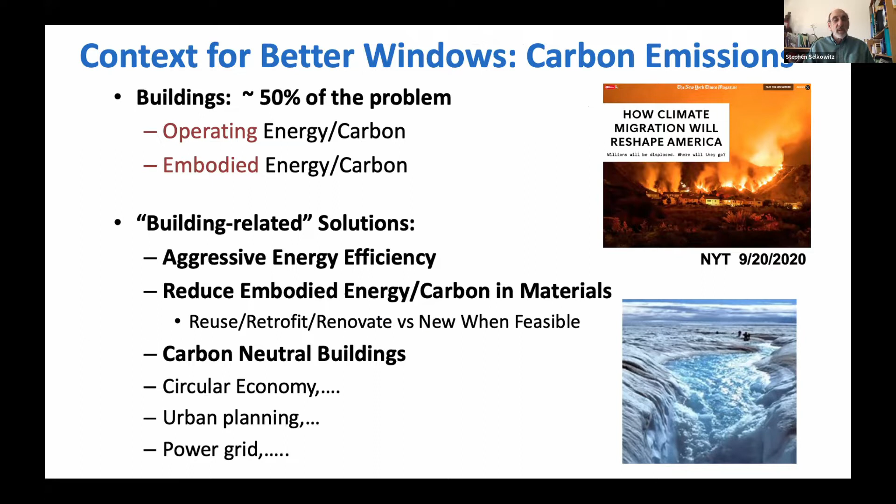There's a whole other long list of building related solutions. And I want to repeat again a theme I heard this morning, that although we're talking about windows, we're really talking about windows in the context of buildings. And it's important to understand all those kinds of relationships, a few of which I've just sort of sketched here.

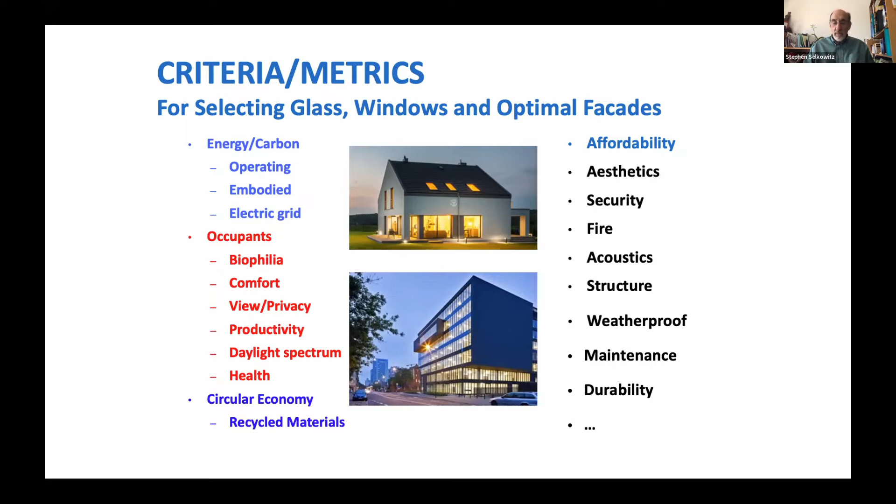But I just want to start with a reminder that this is a piece of a much bigger problem. This came up at the end of the last session as well, in terms of not losing this perspective of the forest for the trees here.

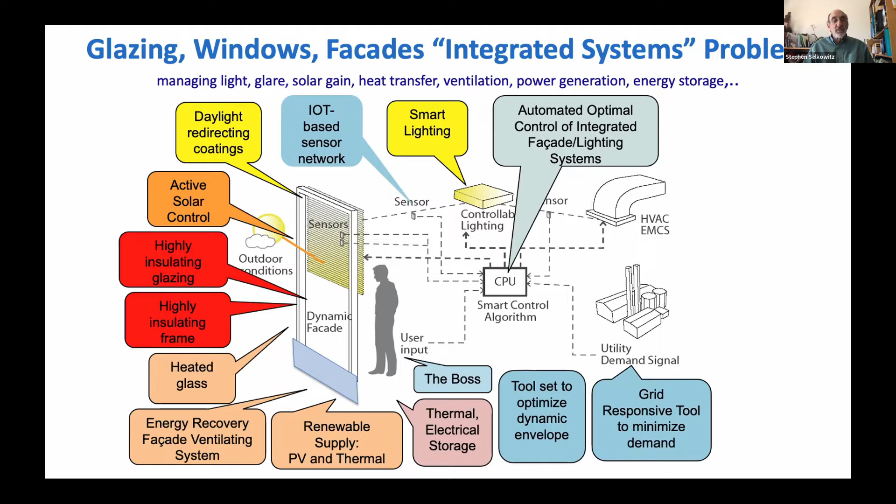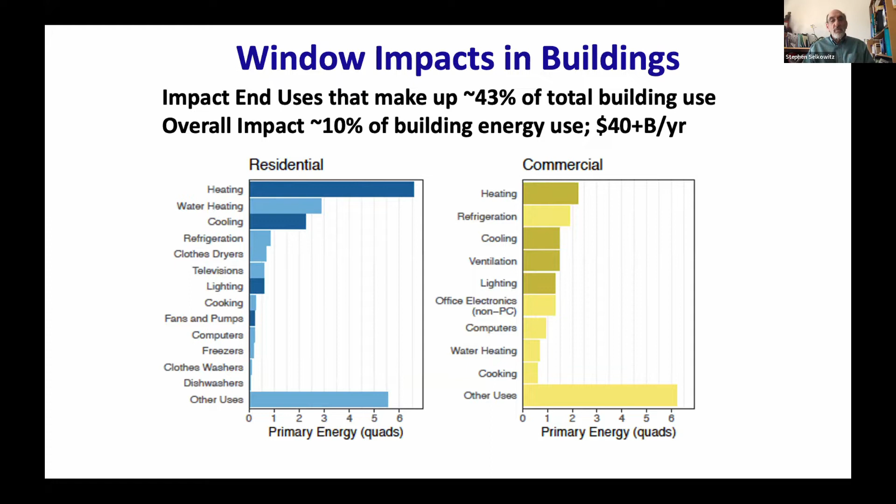So drilling down a bit into the role that windows play, if you look at the building sector in the U.S., windows impact mostly heating and cooling with some ventilation and lighting. That impacts end uses that make up about 43% of all the building use. And if you look at the pragmatic part of what they actually impact, because they don't obviously do everything, it's about 10% of all building energy use, or about $40 billion a year. So there's a target there to be saved.

If we drill down a bit more and look at a few separate issues here, one of the points I want to highlight, I'll come back to later, is that this is not just a new building issue, this is an existing building issue as well. So we have 48 million homes in the US, about 41% of all the houses out there, that are still single glazed. And there's this market out there of 1.4 billion windows.

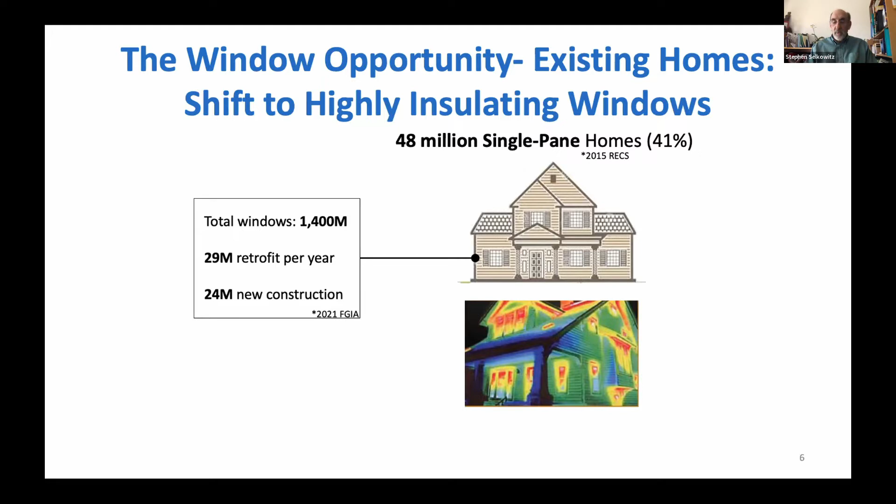We're replacing them at the rate here of, well, the 29 million retrofit a year. Some of that is replacement, some of that is adding a room to a house. But we're replacing at a pretty slow rate. We aren't going to make a lot of progress in taking care of all those single pane windows unless we do something special about it. But the problem isn't just older buildings. The problem is new buildings as well.

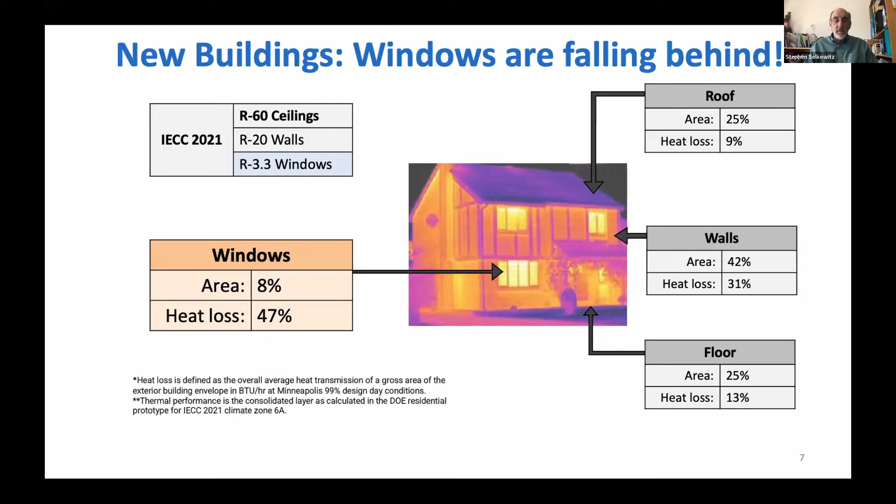Now, my perspective on this and the work I've been doing for 40 years has been that we can do much better. And in fact, I go out to the extreme and say that we're smart enough to design window and facade systems that will do better than an insulated opaque wall. And not only that, but we can do it in almost any climate and pretty much almost any glass area.

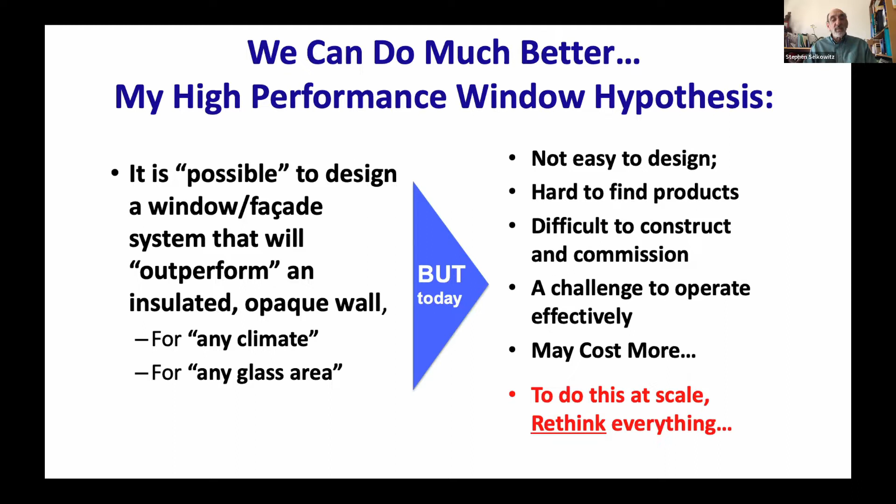Now, that's the theoretical limit, but the caution's on the right. It's not going to be easy to do. The products may or may not be out there at the moment. You still have to build it and operate it effectively, and it's probably going to cost more. But at least we think it's technically possible to do that. And at least in terms of trying to frame the discussion, it starts to give you some sense about what the possibilities might be.

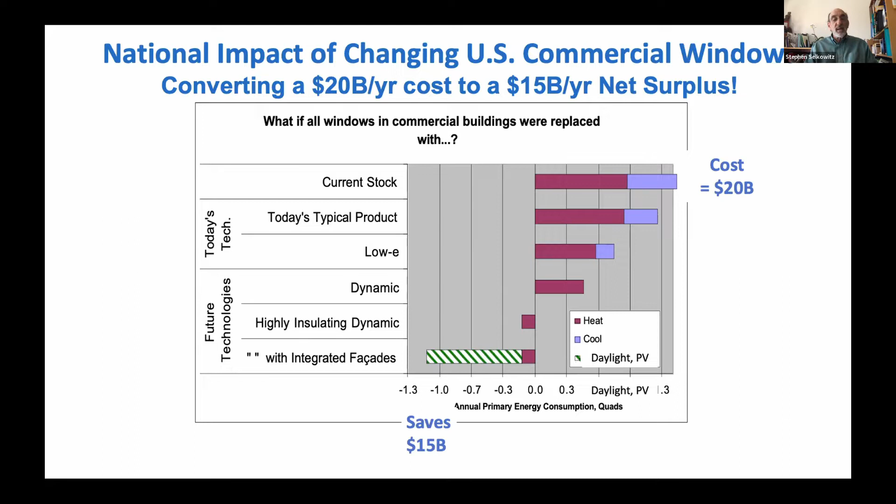But the key issues in the middle here are basically reducing the heat loss, the highly insulating windows, and because of the role of cooling in these buildings, you also want to control the cooling load. So you can get from this 20 billion cost to a $15 billion savings if we do all the right things. Now, this is going to be obviously sensitive to building type, to building size, to climate.

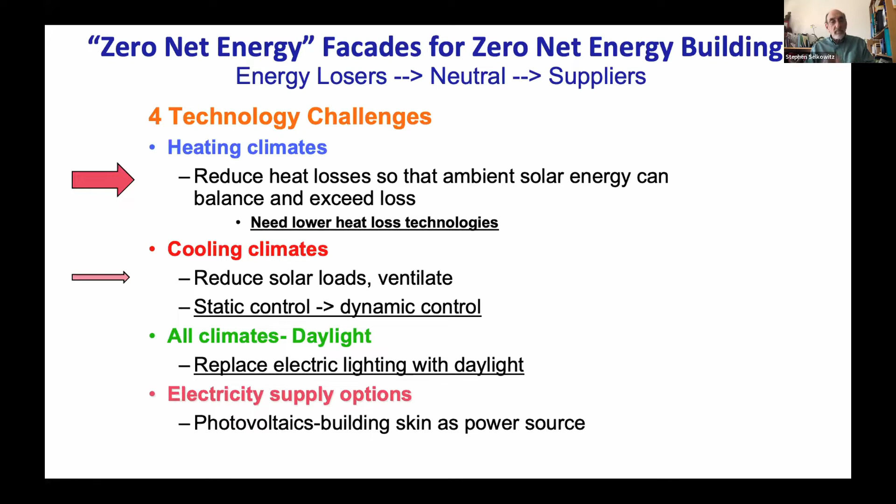And just in terms of thinking about climate here, this zero energy facade or zero net energy approach obviously is going to be different in a heating climate or a cooling climate. And for purposes of the talk now, I'm going to focus more on the heating side, but I don't want to lose track of the cooling side. These are increasingly important also because a lot of the construction in the US is in southern climates where cooling is more important. So let's take a look at the window market in more detail. Good news, bad news curve here. This is a plot of the sales of US windows.

This is residential windows from the 70s, early 70s to about now. So you see the gray curve there, single glazing. After the advent of that first energy crisis in the 70s, single glazing dropped, double glazing went up. That was sort of good news at the time, but we can do much better than an R2 double glazing. And the orange curve there are low-E double.

And this, in fact, I started at the lab in the mid 70s, and the first project we worked on was to try to get low-E out of the laboratory into the marketplace. And I think the track record here looks pretty good. We've gone from 0 to about 90% of the market. But these windows are still only about in the range of R3.

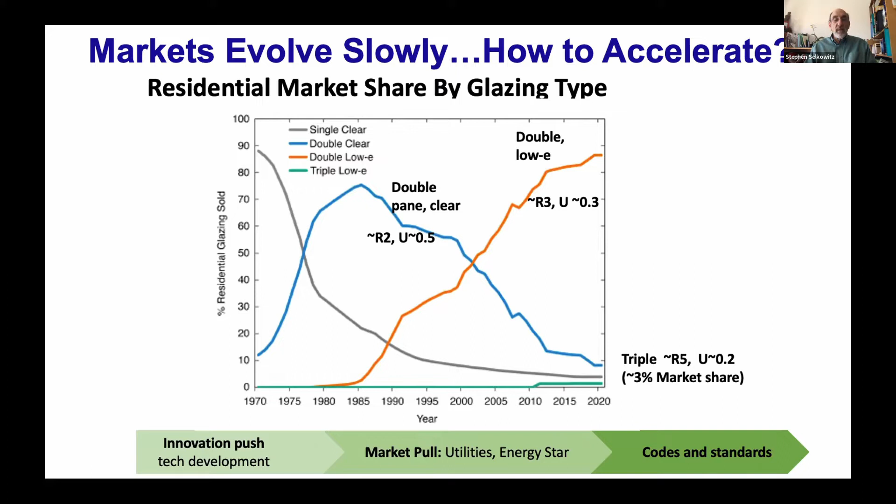If you look at the bottom on the right there, the green line is triples. It's a couple % of market share, and it hasn't changed a lot in a long time. So we have a real challenge here. The other thing on the good news, bad news part is the fact that we're up to 90% on double low-E is good. The fact that it took 30 to 40 years, if we have that kind of track record going to triple, we're going to be in trouble because we can't wait.

So what do we know about triple glazed windows in homes today? Most passive buildings, passive houses, I think probably have them. There's a collection of what we'll call zero energy or zero energy ready homes in the US. There was a survey done recently of a bunch of those builders. They found about 2/3 of those builders were using triple glazing. So passive house uses triple, some of the zero energy homes use triple, that's great.

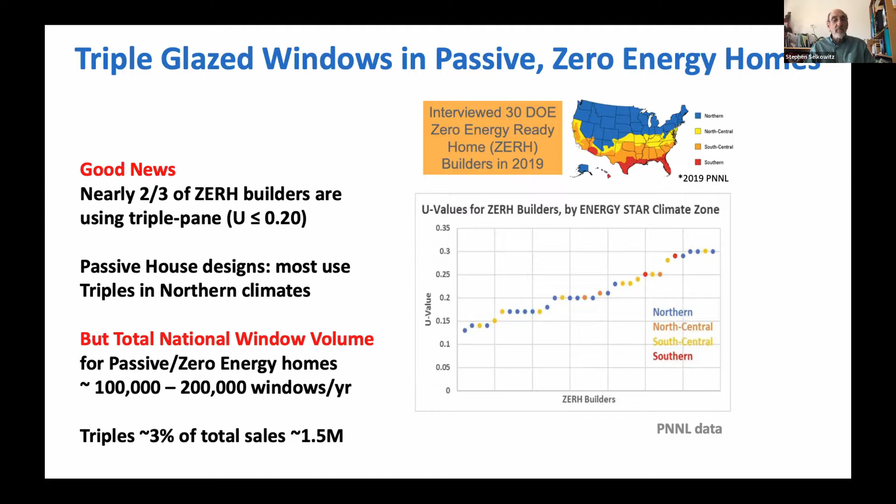If you add them up, and I've tried to guesstimate some of these numbers, I think if you look at all the buildings that fall in those two categories, you end up with a couple 100,000 windows per year in a national market of 50 million. So if you're a company making windows and you say, I want to make windows for the market, this isn't yet at the point where it's going to attract a lot of your attention. That chicken and egg is partly why we see such a small number of triples in the market today.

Now, take a slightly closer look at where windows are sold. These are the Energy Star criteria for climates, which map other code requirements also. You see that most of the windows are in the north and north central. Notice that the retrofit market is bigger, which makes some sense. These are probably older cities with older homes than, for example, in the south. And I'm starting to flag Energy Star here because my theme is going to be that Energy Star has some traction in the marketplace, and we want to try and build on that traction.

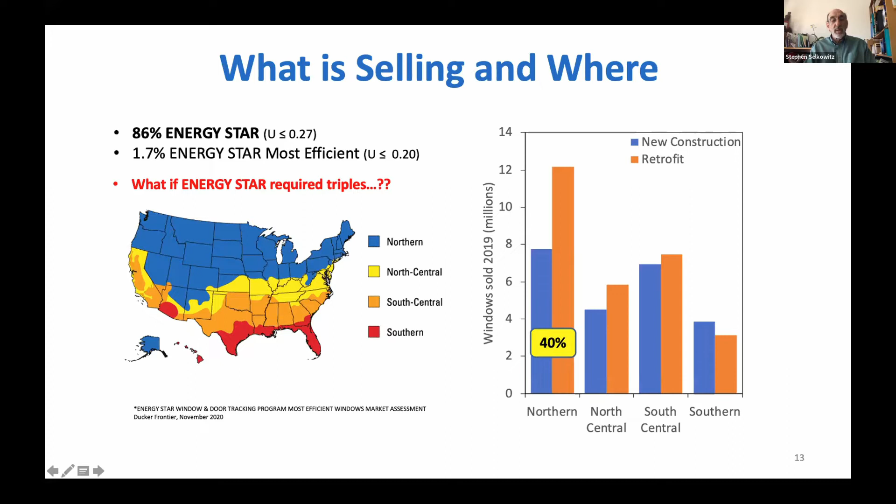The current Energy Star in the northern part of the US is a 0.27 window, which is easily obtained by double. That's partly why you see the dominance of those double low-E. But this question I ask here, what if Energy Star required triple? What kind of a difference might that make? So this is the sort of theme for the major middle part of the talk here, is that Energy Star has a lot of traction in the US. It's a voluntary program, but it captures 80 to 90% of all sales.

And if we could move that program to require basically triples, at least in the northern half of the country, we would reframe the way that window companies look at the market and perhaps get them to spend a lot more time and energy offering the products that in principle we know they can make now, but they don't make in volume. There's some organizations such as Partnership for Advanced Windows and the utility incentive programs that I'll come back to later that are trying to leverage this as well. And I'm going to come back with a little more detail on Energy Star in a minute as well.

Before I get into that, though, I also want to repeat comments that were made earlier today that although I'm going to drill down mostly in the glazing portion of this, the glazing is only a piece of the overall window curtain wall framing, and those in turn are only pieces of the bigger wall integration, thermal bridging. You've heard a lot about that this morning, so I'm going to focus on a piece of the problem, not the entire problem.

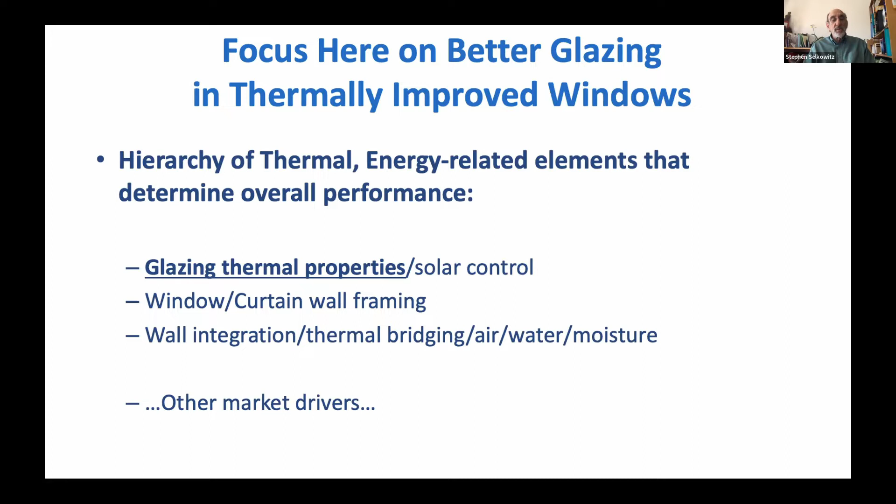If we go back to the manufacturer side, though, although in principle it's straightforward to make a highly insulating triple glazed window, if you look at it from the manufacturer's point of view, there's a lot of moving parts here. There's a lot of pieces and parts that you have to decide on. Helen went through a lot of the detail just on some of the spacers and the sealants. And there are those kinds of issues that exist across the entire portfolio of elements of the window here.

In the upper portion are glass and coatings, on the left are spacers and sealants, and the right are sash and frame. So you get all of this stuff on the top part that goes into the IGU, and that goes into the sash and frame, and you get your window. But there's an awful lot of work that goes on behind the window in terms of all of the details. And as you heard this morning, those details really do matter.

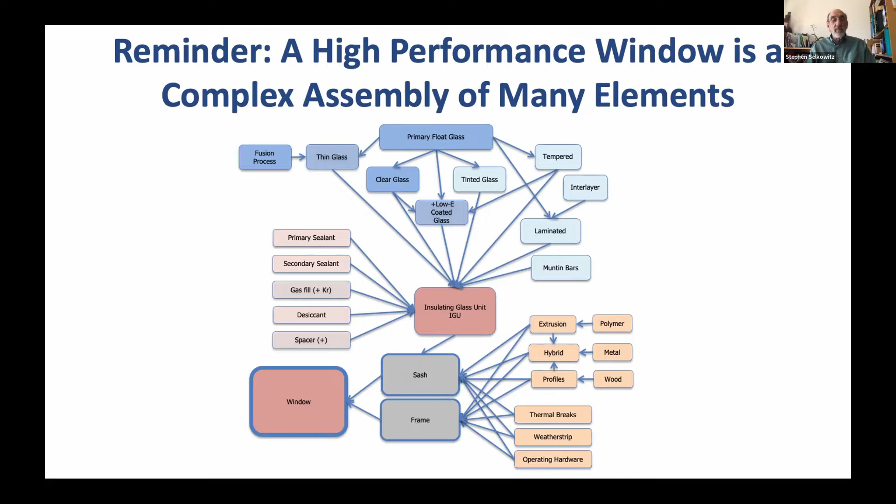Now, the other side of the coin is you have to be able to make this and make it cost effectively and at scale. The good news here, at least on the IGU side as well as the window side, is there's a lot of automation going on now in the marketplace. These are lines that are like 100 feet long that take raw glass or coated glass in the front end and end up with a fully fabricated IGU of any size and shape with gas filling and all that. These are on the market now from a lot of different companies. They make on the order of 1,000 units a day.

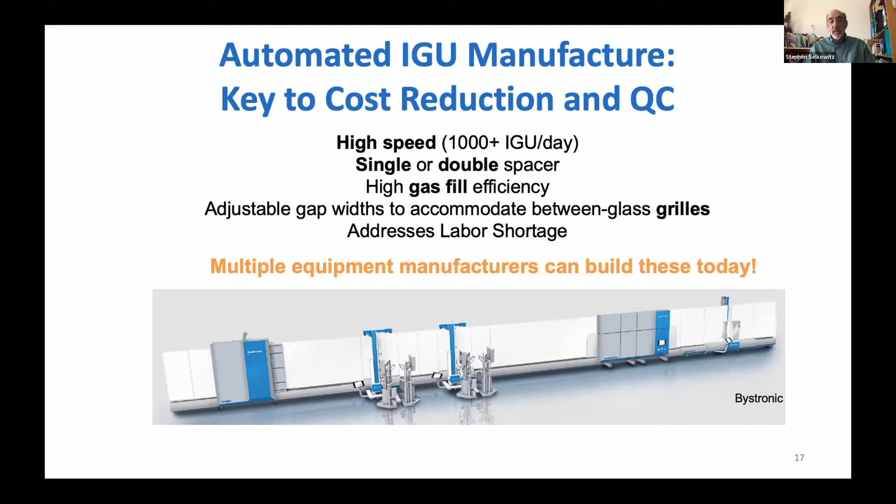So if you think about the capacity and the market needs, if you have a tiny market, if you're only making 30 or 40 windows a day in a specialty market, you aren't going to invest in a machine like this. So getting volume up, getting the market to see that volume and understand it and build for it is critically important. Now, we want to try to get a sense of what doubles and triples can do in the market. I want to talk about this transition from double to triple.

The NFRC product database is a good resource. This has been mentioned earlier today a couple times. This lists all the products that are NFRC certified. I'm going to talk now about this new Energy Star. Energy Star version 7 was proposed, and there's a new draft out. Assuming the draft goes through as planned, it might be effective middle of next year, middle of 2023. But you need time to plan for this anyway.

The numbers you see on the right there, in the northern zone, it would require a U value of about 0.22. There are some trade-offs here. You can do a solar heat gain trade-off, as they've done in the past, that brings it up to 0.25 or 0.26. But the primary target here is going to be this 0.22.

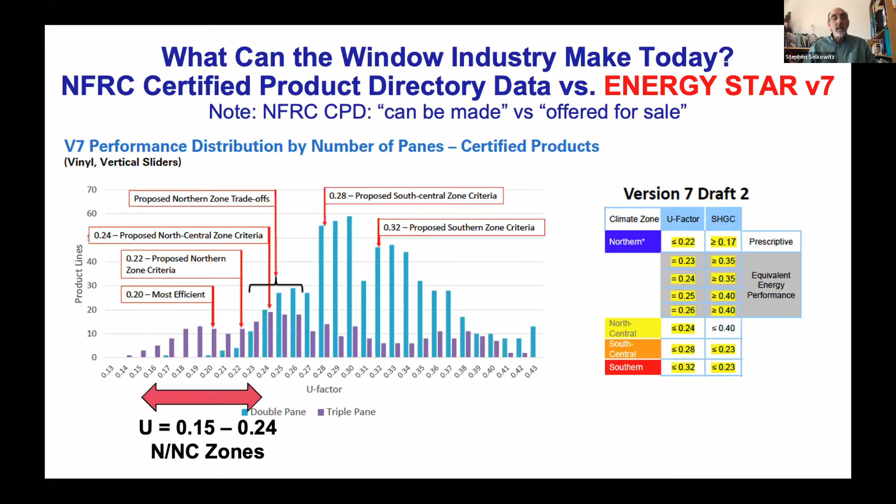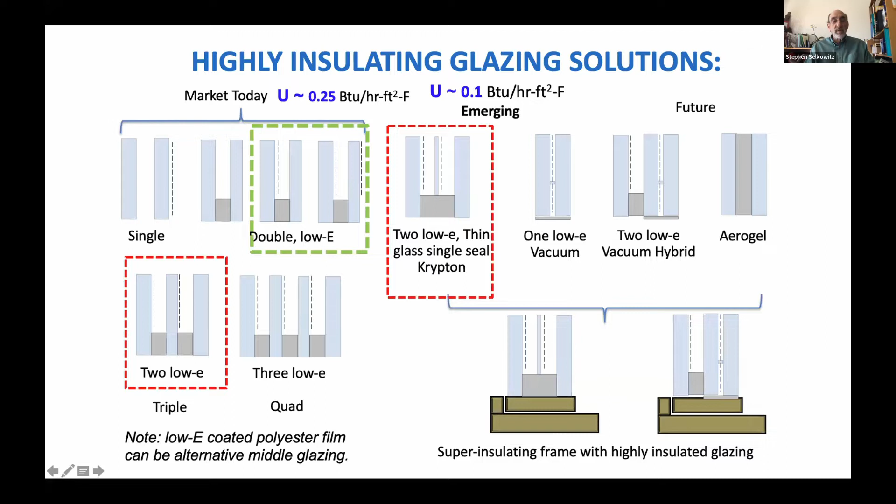I'm going to come back to that in a minute, because that's a strategy or an approach that we think might make some sense for companies who currently make doubles, don't want to retool sash and frames to fit triples, but want to be able to meet those 0.2 U value requirements. And in the lower right here, I'm reminding you that the sash and frame make a difference, even though I'm focusing here on the glazing.

And again, this issue came up extensively this morning, the NFRC standard size versus the way the Passive House deals with all of this. Just as a reminder, if you have a fixed window with the NFRC standard size, 70% is roughly center of glass, and the other is edge of glass and frame. If you have an operable window, it's even less. So I'm going to talk now in a few slides about glass properties and window properties, and making the distinction here, because the glass properties can be easily brought down to the numbers of 0.2 or below, but the sash and frame need to follow through as well.

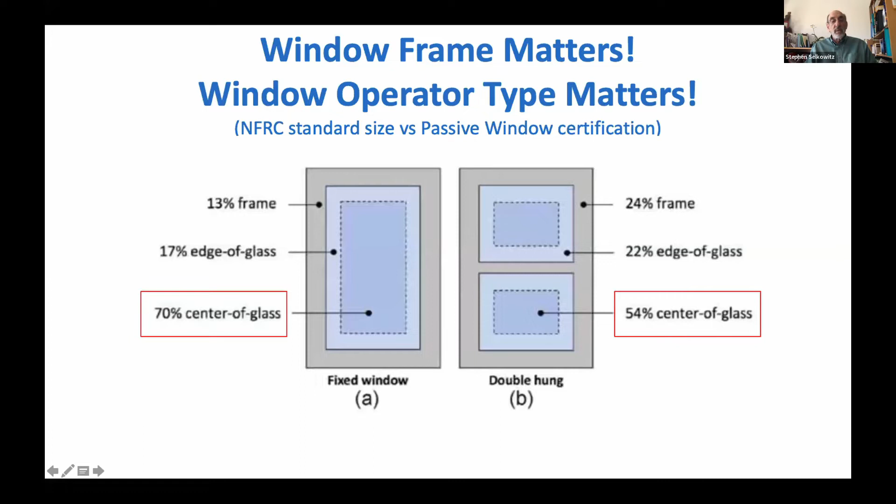So now I'm going to show you 2 slides that are a bit complicated, but I'm going to get into this issue of the width of the IGU. One with a 3/4 inch IGU and the other with a 1 1/4 inch IGU. Something like 70% of all the windows sold in the US now have a 3/4 inch IGU. That's not surprising, because that's where the optimum is for double glazing in terms of the air fill or argon fill. This came up this morning in terms of the differences between US and Europe in terms of temperatures. I'm not going to go back and rehash that. But in the US, a 1/2 inch gap is optimal for argon or air. That's why you have a lot of these 3/4 inch IGUs.

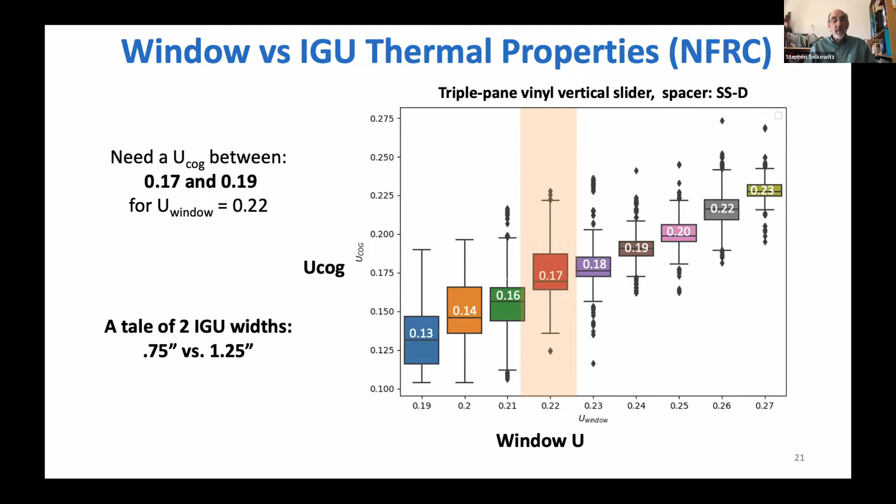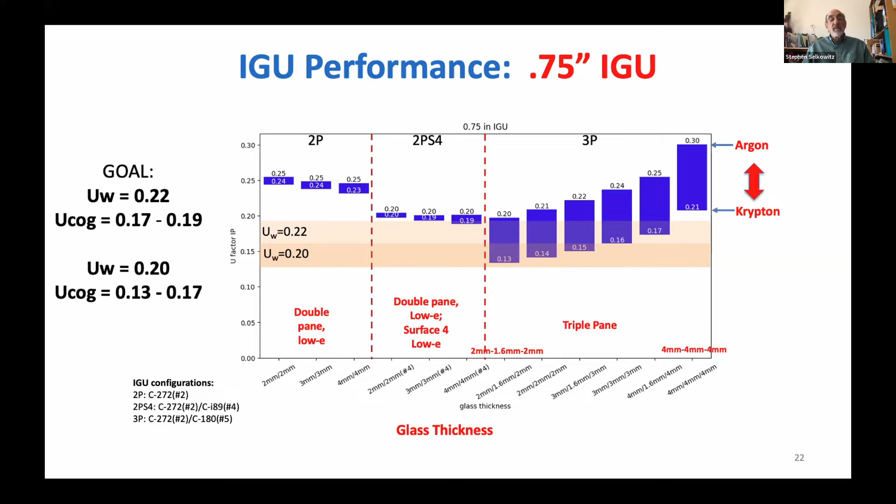So the reason I spent a few minutes on all this is that if you're making windows now, and you make a window with a 3/4 inch IGU, you have some tough choices to make about how you would get to 0.22 in terms of the options I showed you before. If you're making a window that has a wider gap now, the sash and frame already accommodate a 1 1/4 inch IGU, you have lots of options and it's much easier.

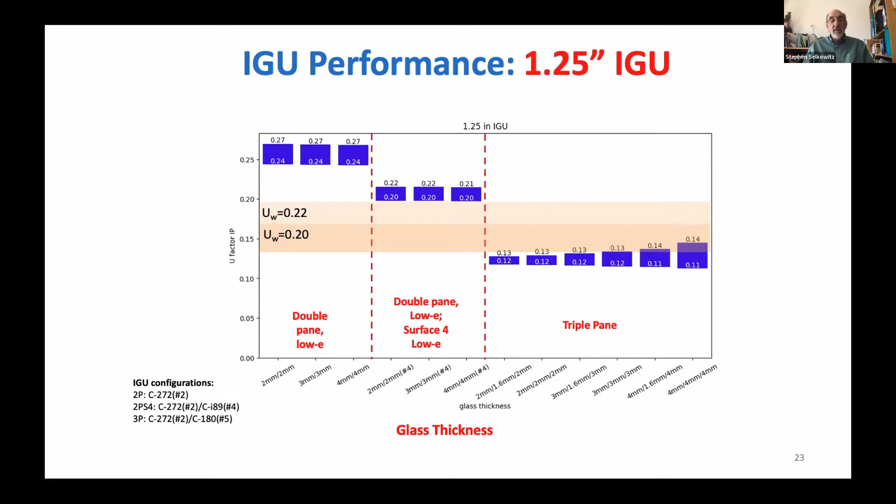So the one thing that we worked on to try to help those folks that are making the 3/4 inch IGU is to be able to achieve the 0.22 value, the 0.2 value, without changing sash and frame. In the long run, you say, well, they should change sash and frame because the world evolves, and maybe they will. In the short term, though, if you make windows and you have to think about investments, you'd perhaps like other options.

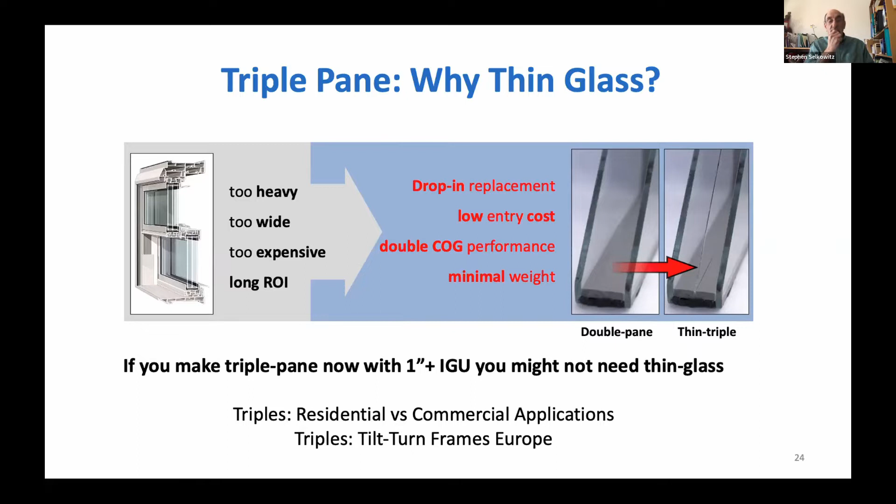So the concept here is to drop a piece of very thin glass into the center of a double glazed IGU, this 3/4 inch IGU. Add either argon or krypton, depending on what you're trying to achieve, and look at what kind of values you get. If we look at this in more detail, this is what we're doing.

But the other thing you could do, especially with this thin piece of glass, is just essentially hold it in the center of a single spacer, keep it from bouncing around, but not sealing it. That pressure equalizes the 2 gas spaces. It means you only have 2 seals. It means you only have 2 possibilities for leakage. It seemed like an intriguing way to go.

I'll throw out one other little factoid here. There's about as much thin glass that goes into American homes each year in the form of televisions as window area that goes into homes. We buy about 40 million televisions each year, which go into your homes. There's about 50 million windows that go into homes. So 50 million windows go into houses, 40 million TVs go into houses.

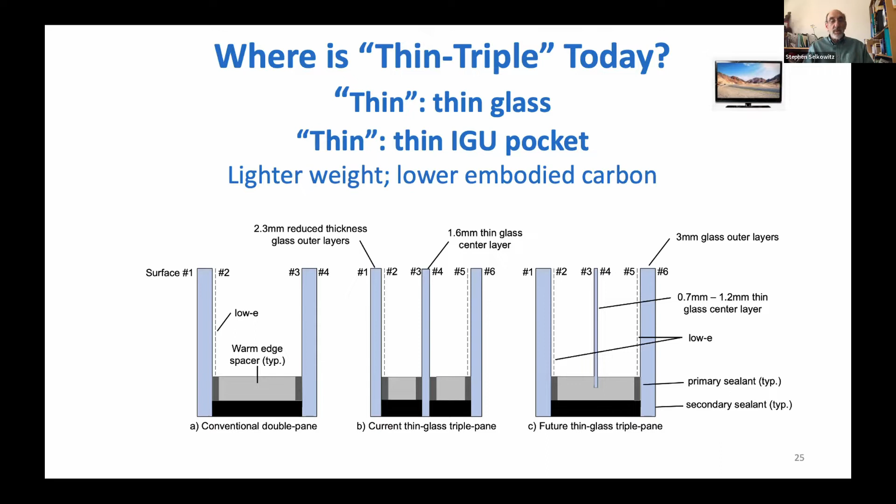And these days, the TV is rapidly assuming the size of a typical window. Typical window is maybe 12 to 15 square feet. Typical TV is 7 to 8 square feet. So there's actually a lot of industrial experience with thin glass, just not in the window industry. Now, a few folks have.

Steve, yeah, just a quick, maybe 1 minute more to close up. Okay, that's going to be tough, but I'll shoot through them quickly.

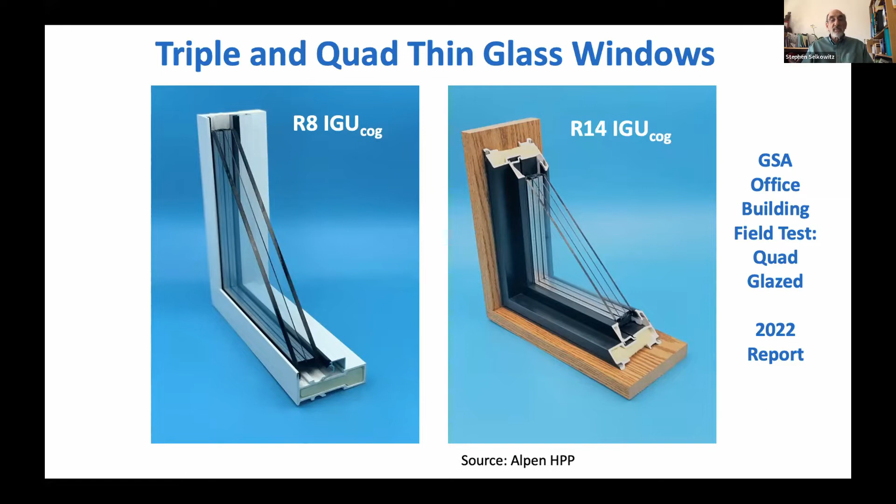Okay, so there are some products on the market now that use thin glass. Notice if you go to a quad, that's an R14 center glass. So actually, the closing slides, and so that was my end on the glazing.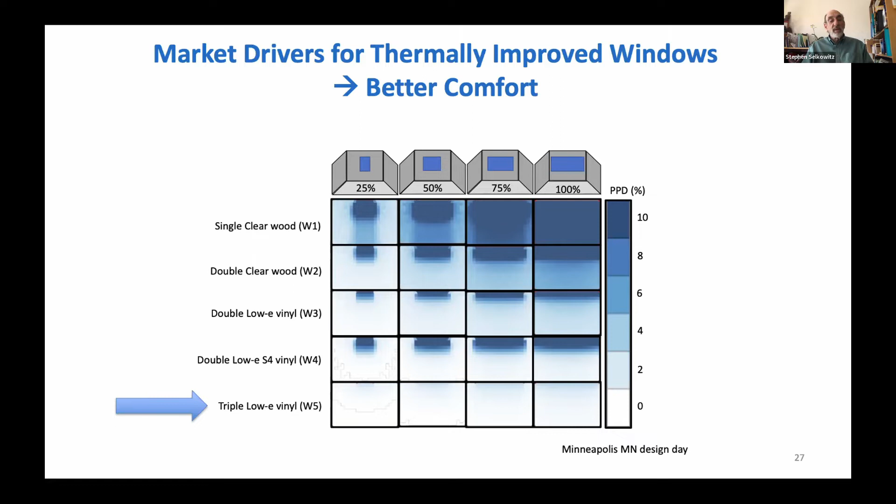I just wanted to throw in a few more pitches for why we want better windows and why the industry should shift. And I'll try to do this in not much more than a minute. So comfort, this has been mentioned before. Triple glazing gives you ideal comfort in any glass area here from 25 to 100%. Notice if you go to double or double low-E, portions of the room are going to be uncomfortable.

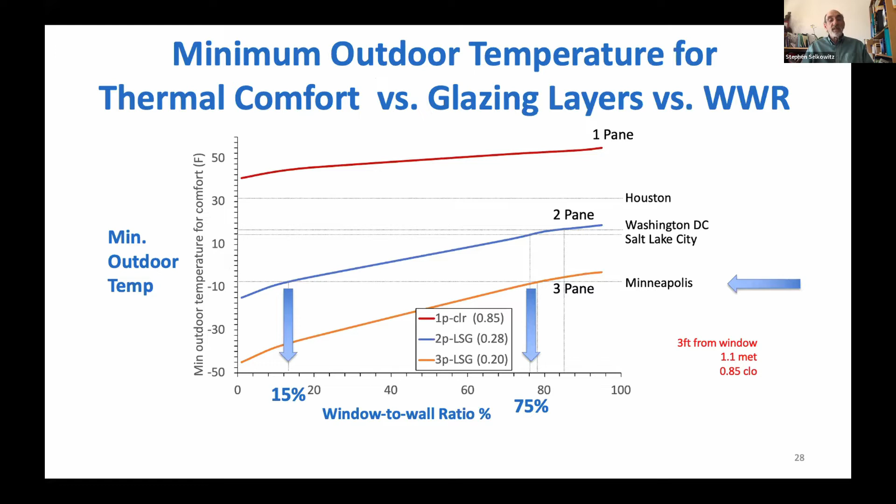This is a different way of looking at it. A version of this was shown this morning. If you're in Minnesota and you want to be comfortable as a function of glass area, if you are using triple, you can have glazing up to 75%. If you're using double, it's 15%. So there's a clear advantage there.

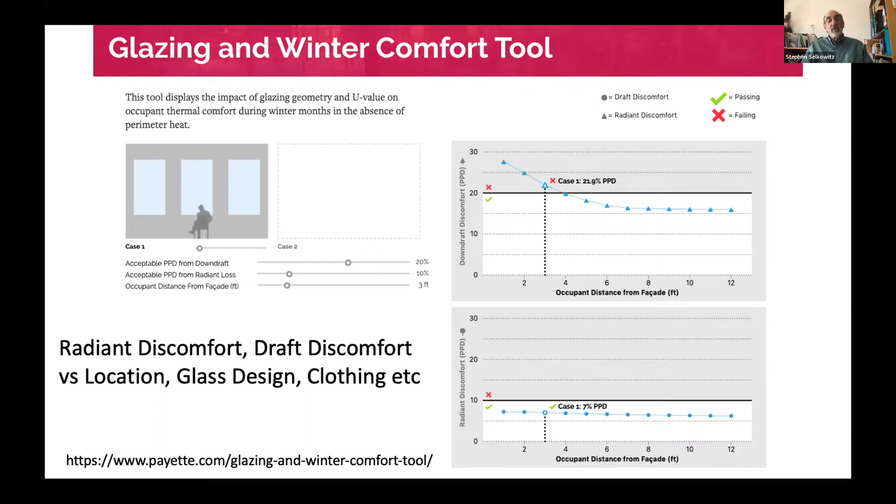If you want to dig into this in more detail, there's a nice calculator online, courtesy of Payette. This deals with radiant discomfort from the surface of the glass and draft discomfort from cold air falling off the glass.

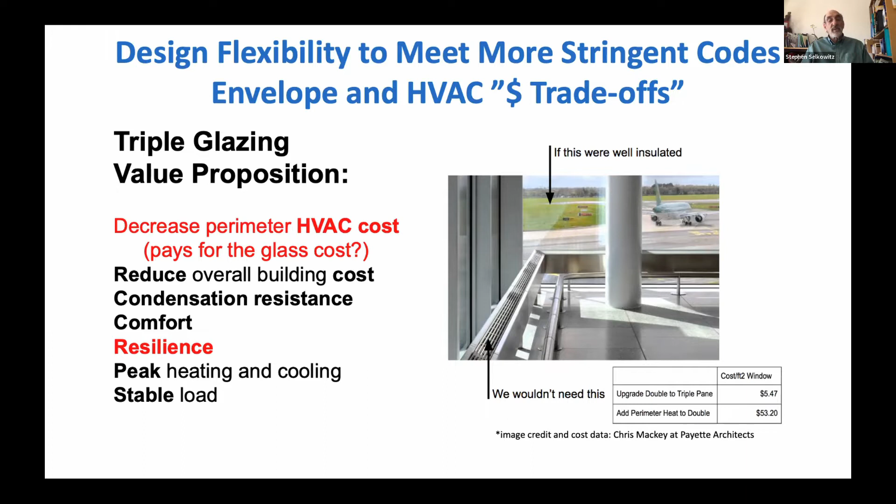The other related piece here, which gets into cost, is if you're building, in a lot of cases, you'll see all glass facades with these heaters at the base of the glass. This isn't so much to heat the space, it's to keep people comfortable near that cold glass area. If you go to triple, in most cases, you aren't going to need that. And the cost of going to triple in general should be less than the cost of putting in those radiant heating systems. The problem is you have to have confidence in this on the part of the engineer that that will really work.

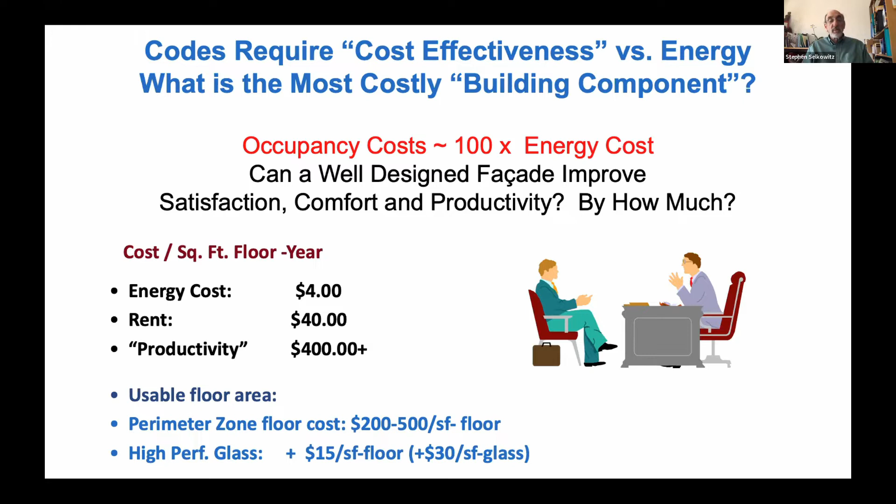And if we talk about cost, aside from all the energy savings, the biggest cost by far in a building are people costs. And I think you've all heard versions of this, that the cost of occupancy in a building, at least a commercial building, is on the order of 100 times the cost of energy. There are some other interesting issues to explore in terms of the cost of floor area. Floor area today in an office building could be $200 to $500 a square foot. You often give it up by moving the desks away from the window in order to preserve comfort. You don't need to do that with the right solar control and the right insulating control.

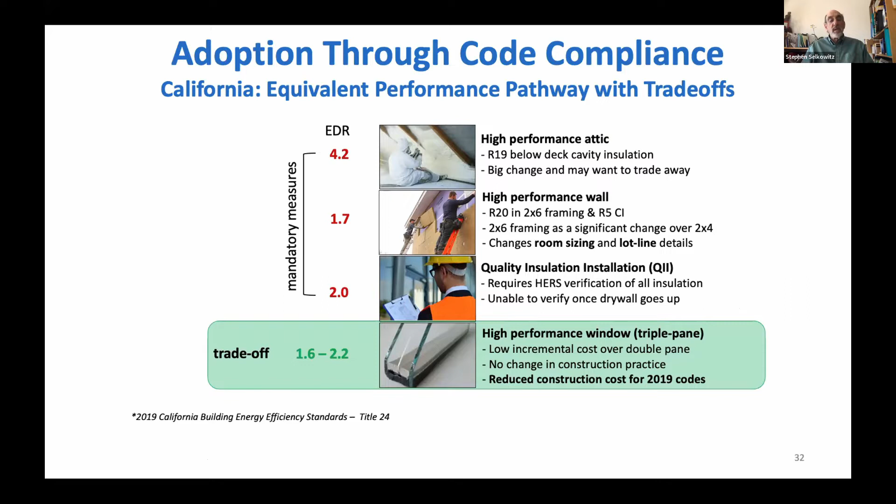One other example, modern new codes, California's new code, they require new high performance walls, but they don't require anything more in the way of windows. But you can do trade-offs. And if you're a builder and you don't want to transition from 2x4 to 2x6 framing or exterior insulation, you can use triples instead. So we've seen a niche market here, possibly for better windows in California.

So I want to close by talking about some groups that are pushing or working hard on this. I mentioned PAWS before, Partnership for Advanced Window Solutions. This is a group that's trying to change the marketplace. It's not a technical group per se, but it's going to leverage and lean on organizations that are doing that. And I'll also throw in here for good luck that, I don't know if all of you know, 2022 is the International Year of Glass, and their trademark is Glass Can Save the World. So I think we want to pile on and help explain how they can do that.

One of the things PAWS will do is work with utilities to get incentives for better windows. So in the first year that you get new products in the market, they're typically more expensive. If we can help offset some of those costs, that's an option to do.

And then finally, the last comment is that we have a lot of interest in the US in decarbonizing the grid, changing out all that gas heating to electric heat pumps. It's crazy to do that in all those single glazed and double glazed homes. We could save billions in both the heat pumps' cost themselves, as well as the electric infrastructure that will have to back them up, if we first did something about the envelope.

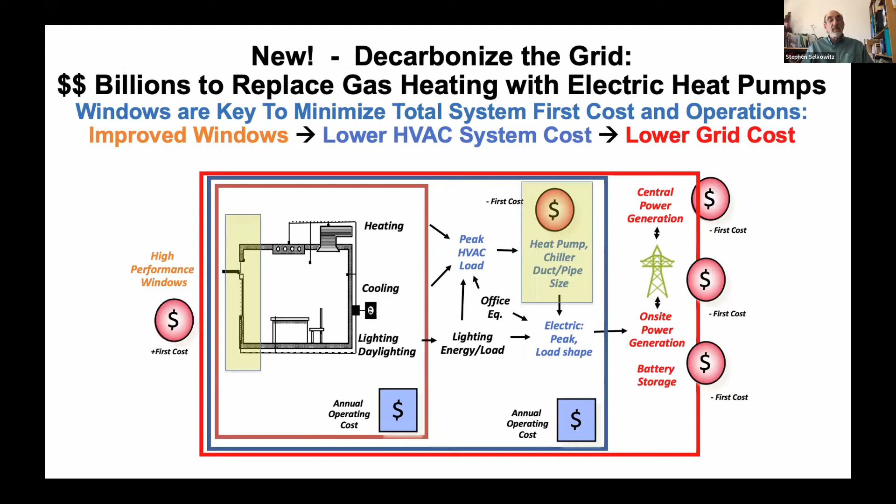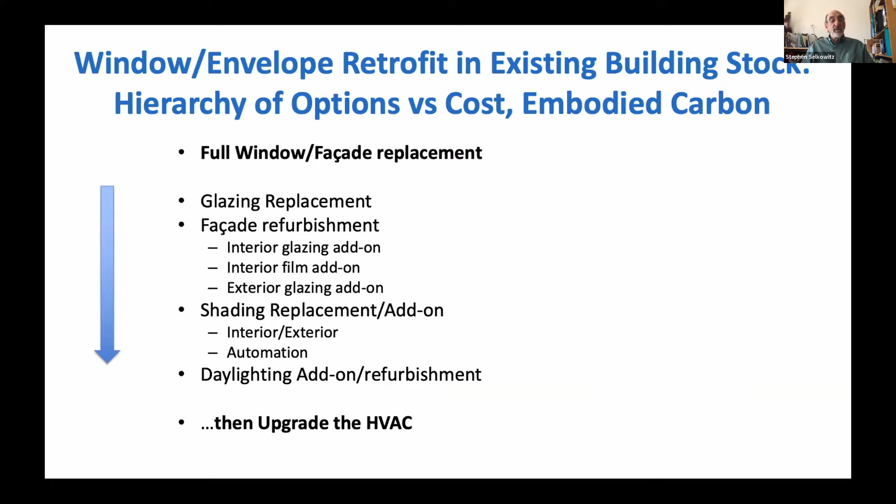And so this theme, of course, a lot of this is going to be existing buildings and retrofit. So I just want to throw in one more picture on the retrofit side, that although full window and facade replacement and retrofit would be great if it can be done and you can afford it, there are a lot of other things to do in the facade and glazing world here in terms of just replacing the glass rather than the whole window, interior and exterior add-ons, shading systems, and so on that we should be thinking about.

So the final sort of sum here is that I think we can add more options to the portfolio that we have in terms of both Passive House and all other buildings by taking a careful look at what's out there now and building on that. And I sort of pitched this idea that maybe building on this Energy Star theme of getting better triple glazed windows out there is a way to go.

We need to be proactive and aggressive in marketing and then innovating where that's needed. In some cases, I think I noted that we can get by using things we have now. In other cases, we have to do some innovation. And the other thing is that I think we need scalable solutions, not just one-off. And that's why looking at these standard product offerings is going to be so important. So thanks, Steve. That's it.

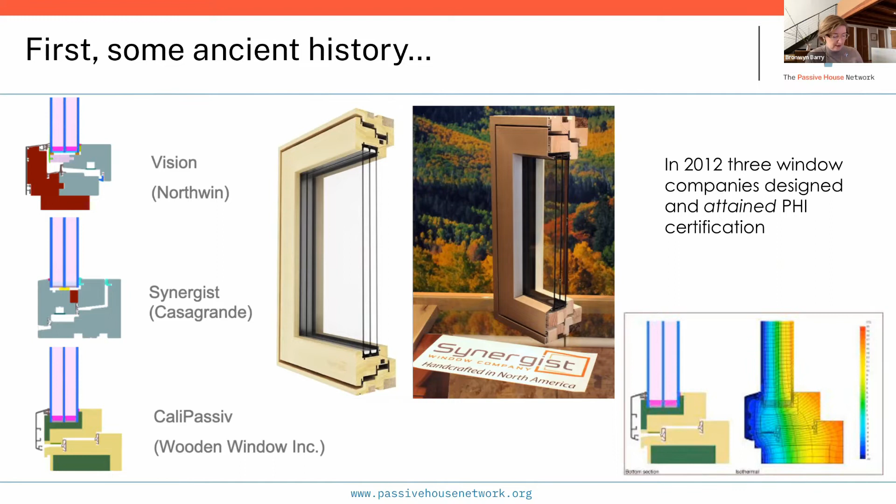The Synergist window and the Northwin window did actually make it into production. The CaliPassiv window unfortunately did not. But it was a heady time, and there was innovation happening. And really, I like to use this as the baseline of where we started, to show that this is really possible. There is interest.

And then take a look at, going to the Passive House database, where we are today. And I have to say, I've gone back from working in the window industry to my design practice. So I haven't really kept up with too many of the updates as closely. And I was very encouraged to see some growth in the last 10 years.

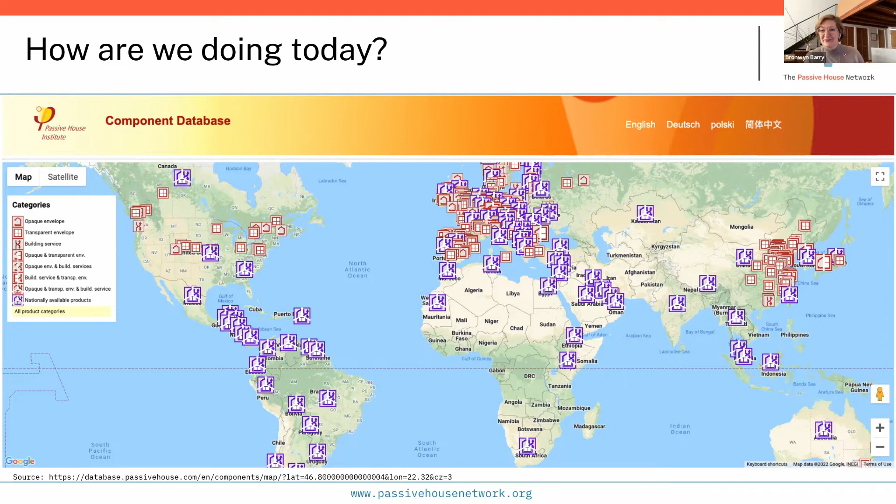And, not to get distracted, but I was also quite surprised to see Kazakhstan and Bhutan and Botswana also have passive house components. But if we stay focused on our North American context, we're seeing quite an interesting scatter of window manufacturers actually producing and selling passive house certified components here in North America.

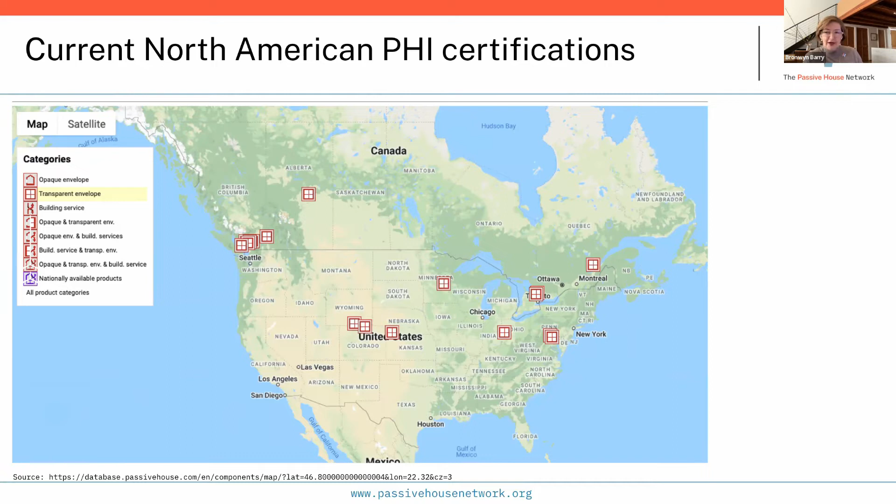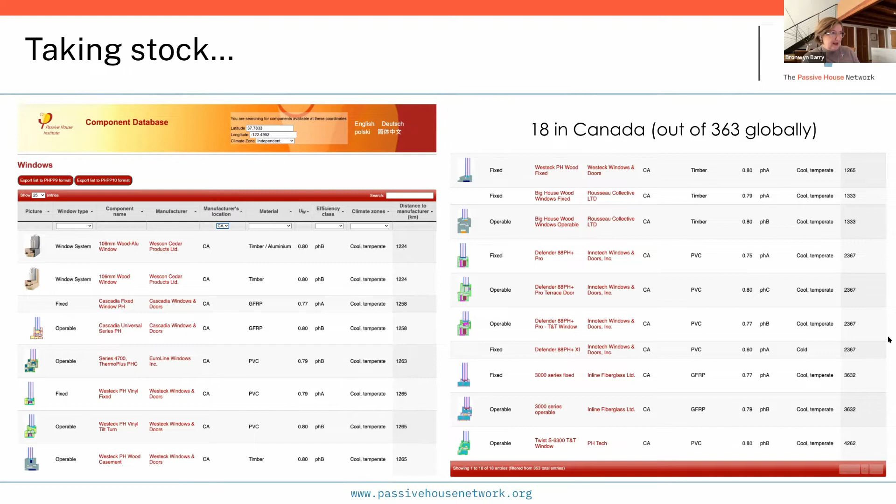Then if we go north of the border, Canada, the Canadians are doing something interesting, and this is what we'll dig into a little further in my presentation. They have 18 punched opening windows being sold and manufactured in their region. And some of the leaders, Westeck, Cascadia, Wescon, really the who's who, Innotech, Rousseau, and Inline are really pioneering some high performance products up there. And again, really encouraging to see this happening.

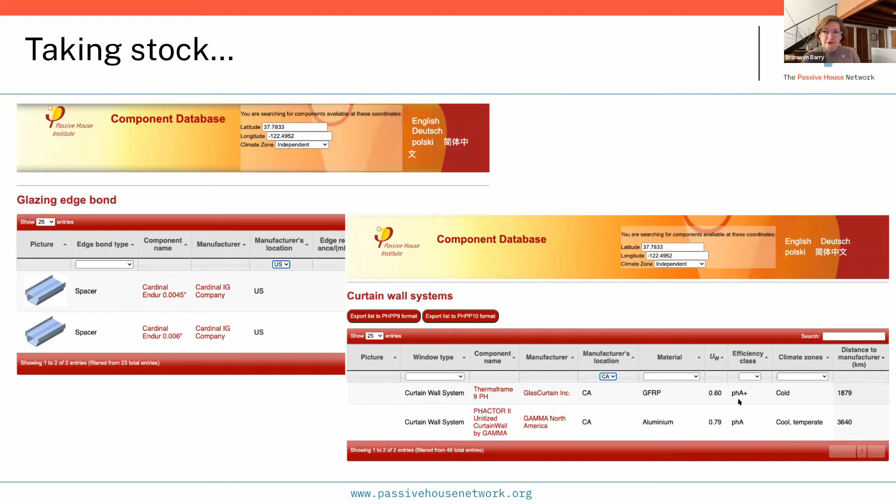And not only in the punch glazing market, but we're seeing spacers being added. This is also a fairly new evolution to have these specific components certified, and also a curtain wall. And we'll hear a little bit more about one of the manufacturers, GlasCurtain, but really quite impressive to see a cold climate curtain wall system to the PHA plus efficiency class being manufactured. This is no mean feat.

And then again, also very inspiring to see sliding glass doors also being certified to Passive House standard coming out of Canada. Cascadia and Westeck, anybody who works in the industry knows that sliding components are always much harder to meet high performance. So seeing those actually being developed and manufactured here is a really great sign.

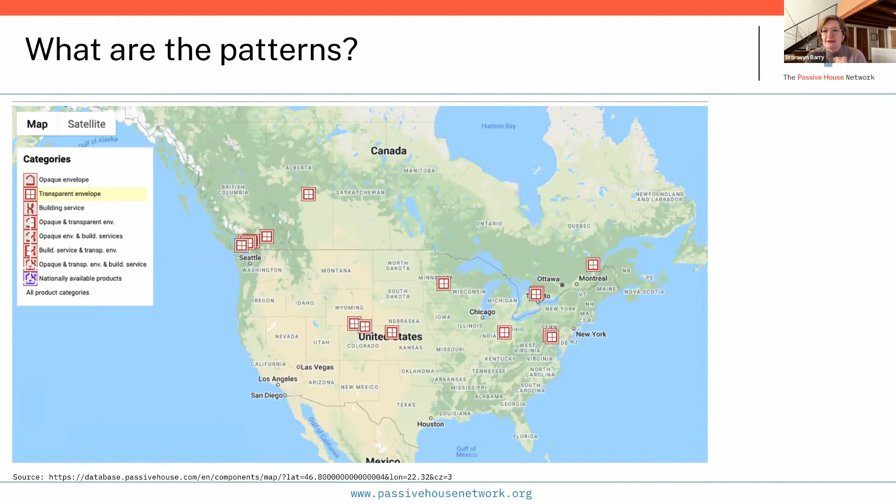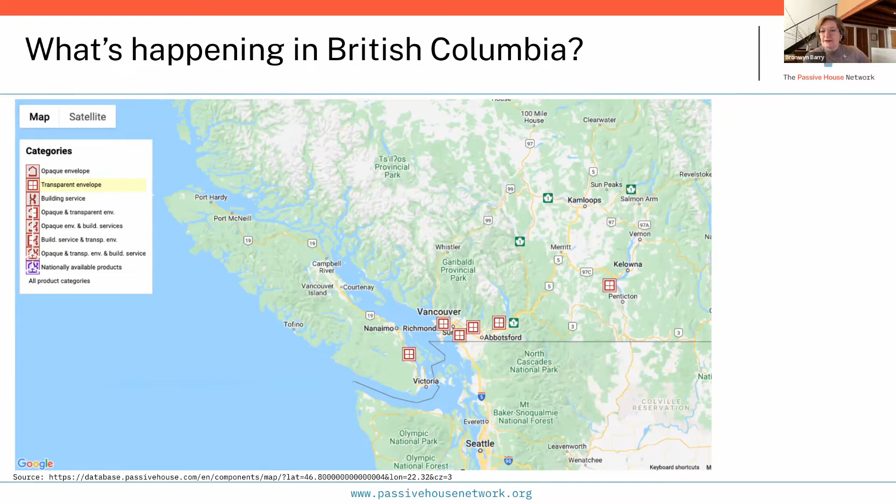And if we go back to that map of where things are happening, what I started to look at and what we're seeing generally in our policy work at the Passive House Network are emerging patterns. And right here is a very intriguing phenomenon happening across the border here in British Columbia. And if we dig down and peel the onion back to see what's really behind this, because really we found very early on that manufacturers are not going to produce high performance components unless there's a market demand. And I think, Steve, you and I can agree on that. That's exactly how Energy Star has been driving the window market.

And as I said, looking back into what was the driver that really allowed those windows to start to emerge and that cluster to be happening in British Columbia. And what I found was this BC government, the Energy Mines and Low Carbon Innovation Department out of the BC government funded an incentive program that specifically supported window manufacturers to develop and design new window products and to assist them in the design, testing, and certification of those new products.

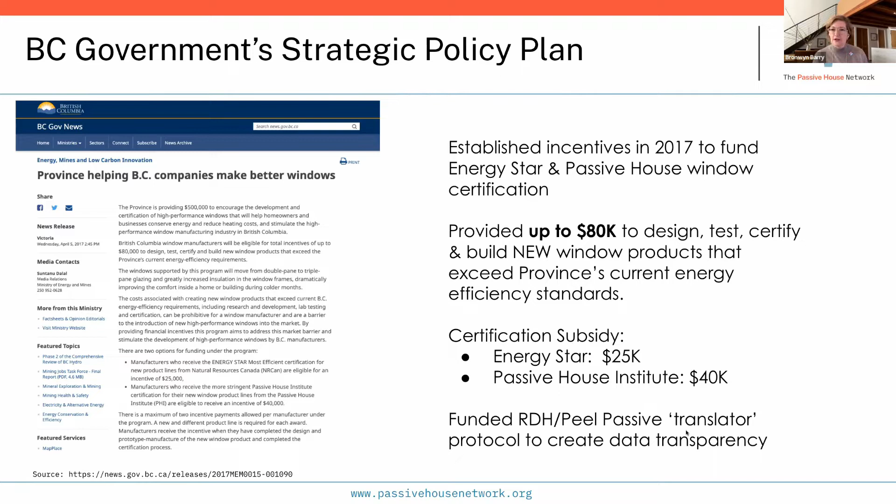The program offered up to 80,000 Canadian dollars, and it provided a certification subsidy both for Energy Star up to $25,000 and for Passive House through the Passive House Institute up to $40,000. And this really was the catalyst that has started really creating that cluster of certified new innovative products coming out of British Columbia. And then part of that funding from the government, in addition to helping fund the subsidy, also actually funded the Passive House Translator protocol that Daniel presented earlier. So this was a very cohesive policy that worked with the manufacturers and also helped create the technical tools for how to move things forward in the market.

In addition to the manufacturer's incentive program, the context that this was moving forward in the market was City of Vancouver had taken the lead on really starting to highlight and initiate passive house building construction. So they had really consciously looked at how to remove barriers to passive house in the Vancouver metro area. They added incentives to increase passive house uptake, and they developed their own passive house pilot projects. So there's a city fire station, there are city buildings that are being developed to passive house.

And simultaneously, or shortly thereafter actually, the BC Energy STEP code created a glide path that identified passive house as one of the end goals of their baseline building code. And this, I would postulate, is one of the key policy goals and drivers that has to be put in place to support manufacturers and incentivize manufacturers to actually produce higher performance products and bring them to market. Because without the market driver, the manufacturers have no business case for developing and bringing those products to market.

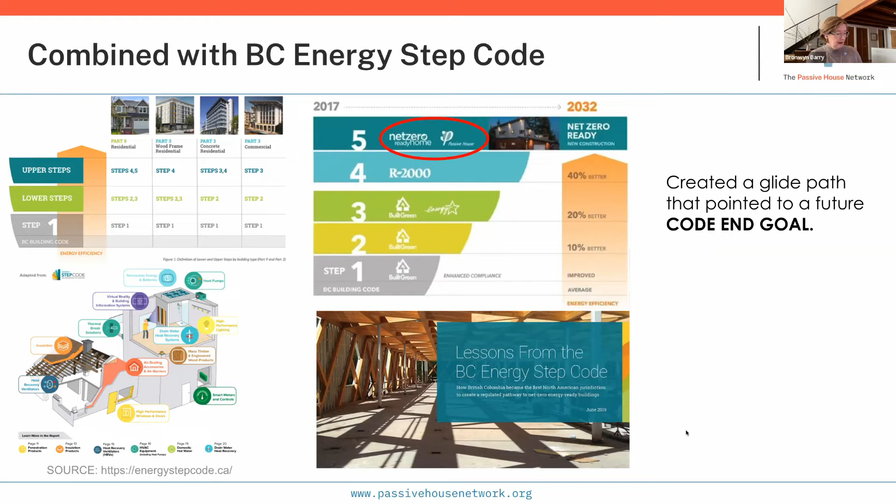And as I mentioned at the beginning, we know they are available. We know it's possible. And I think Steve and Helen and everybody else in the US window manufacturing industry will tell you they exist here already. We just don't bring them to market in a comprehensive, cohesive way. So this sort of goes back to the policy work that we have been really focusing on at the Passive House Network. And this is sort of the core distillation of what we have found in our research, that for policies to really work effectively, they must include 3 core elements. And all 3 of these core elements have to exist simultaneously for the policy to be successful.

And these primarily have been training subsidies. So helping professionals to understand how to do passive house or high performance building or net zero, whichever framework you're aiming for. But training, you have to have professionals who understand what the processes are, the metrics and the tools. The second is project subsidies. So this would replicate the subsidy program that the manufacturers were given. And the third one that is essential is this clear end goal. And that has been provided in British Columbia by the STEP code and by the city programs that are identifying passive house as not the current code requirement, but the end destination.

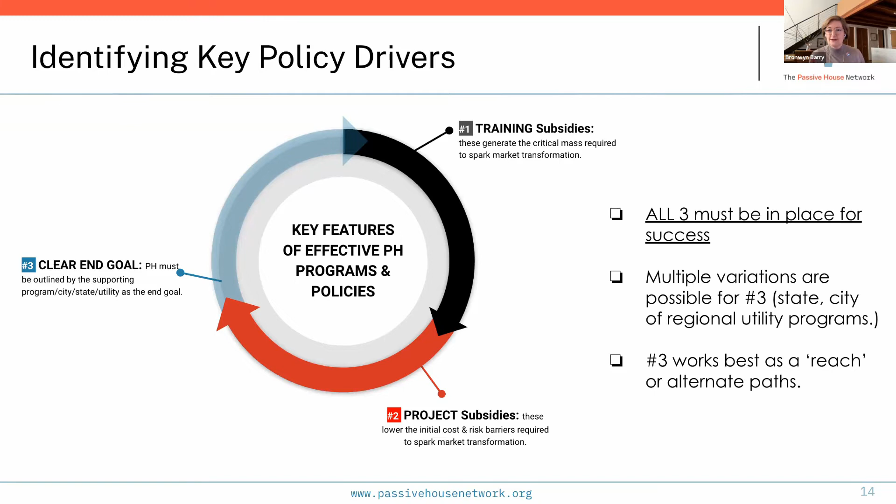And more reasons to be optimistic. I'm seeing this starting to emerge as an idea, as a policy structure in many different places. And the Passive House Network will publish our full policy report at our conference in June, and we'll present it again at the ACEEE summer study in August.

But where I'm seeing really exciting things happening is in the middle of the country here in Colorado. Xcel Energy is doing a structured program. It's not specific for windows, but it gives $37,500 in subsidy incentive for certified passive house buildings for the Marshall Fire rebuild in the central Colorado area outside of Boulder. And interestingly, Energy Star is also given some great incentives there; it was 17,500.

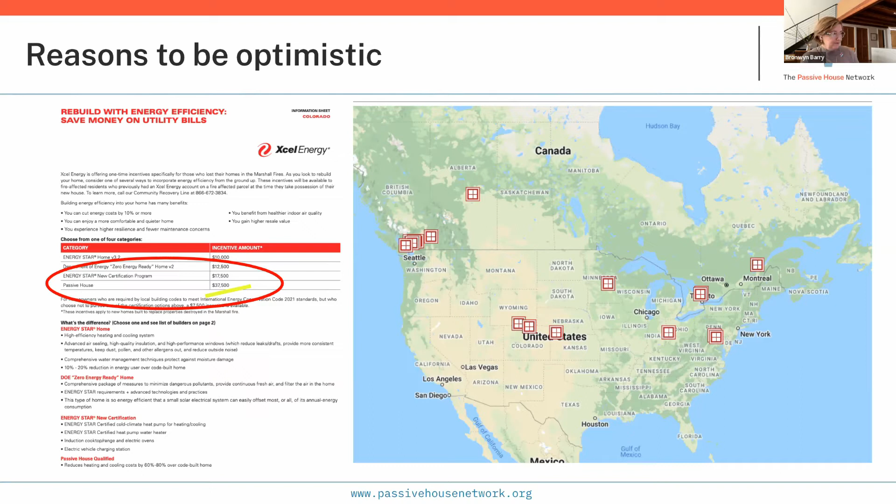So this is really starting to support my tandem theory that I've been promoting here at the Passive House Network, to see how we use programs to work in tandem, and how Passive House can help transform and lead a market to where the larger base of practitioners and industry can come behind with confidence after products have been pioneered and really tested in the marketplace. And of course, I'm assuming that is being done by the Passive House community.

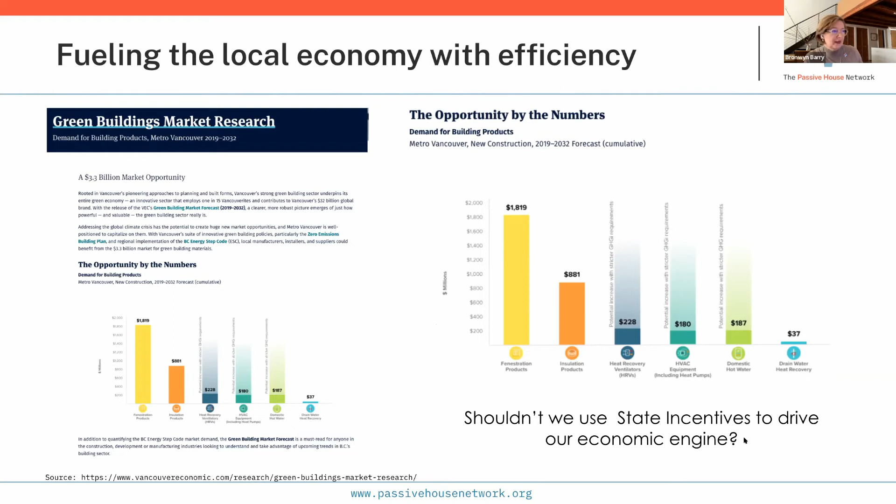And not only is that good policy structure, but the economics behind it are actually quite robust. This is a report that was issued by Vancouver Economic Commission, looking at how fenestration products can really boost local economies. They saw that the potential for fenestration products to inject quite a significant boost in the local economy was enormous. I've expanded the graphic here from their page. Just under 1.819 billion Canadian dollars can be generated in the fenestration industry. So subsidizing high performance fenestration local production actually is a very good investment in a local economy that can pay back quite significantly.

And I'm going to close with a slide that I developed a good 12 years ago on these edge connections. And Helen, it sort of corroborates what you were saying earlier in the session about the impact of performance. It doesn't make a massive amount of difference. Sorry, there's background noise. What I did here was I used the same window profile, and I calculated the outputs for the installed window for 4 different windows, all of exactly the same total square foot area. So all of them were 24.1 square foot total.

This is the window that you most often see designed in residential punched openings. But if you modify it to be a fixed and an operable, or just an operable, wider and slightly less tall, or if you make it narrower and much taller, or a little bit taller, the U performance output actually improves as you go towards the simpler window design. And while the difference is not enormous, going from 0.15 as the worst performer to the best performance at 0.13, if you multiply this over a building, that is where the impact starts to really become quite significant.

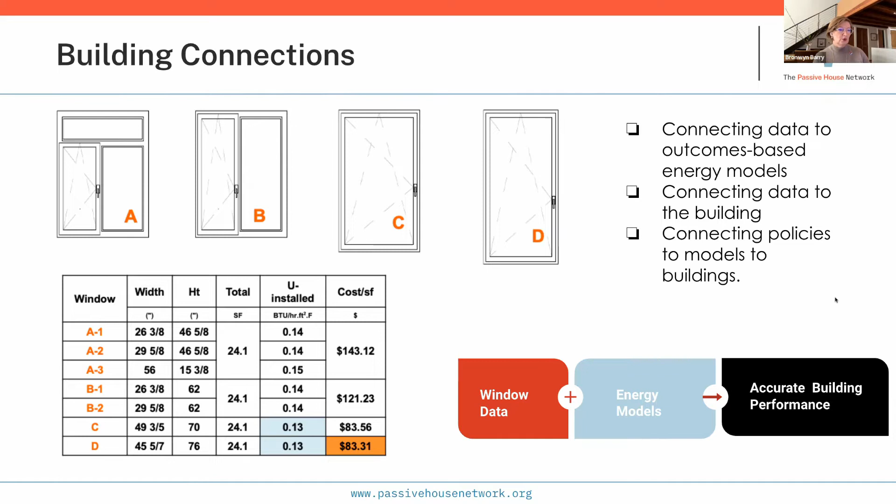And so my point here is, what we're trying to do in the Passive House community is start to look much more closely at these connections. The connection of the window to the building, the connection of the data to the energy model, and the connection of the policies to the model to the building. And I think this is where we have some great opportunities to really work together to drive better outcomes and transform our market and our industry to create better products available for everybody.

Great point there, Bronwyn. And you notice it was all in the design. It wasn't material selection. It was about reducing the frame, reducing the edge, increasing the center. So it's design first, which I think is one of the most important things we should bear in mind on where we should start as we're looking at the thermal performance. But until you have the data about what makes the difference, you can't change the design in an informed way. So it's right. Chicken and egg.

Yeah, great. Well, thanks, Bronwyn. We'll come back to that shortly. So let's move over to Peter Dushensky. Really appreciate your time here. Peter is from Glass Curtain, and he's going to talk to us about innovation in curtain wall.

So that helps us understand some of the issues and challenges with bringing new innovations into our market. So over to you, Peter.

Wonderful. Thank you very much for the introduction. It's a pleasure to be here with such a great panel, and I saw some familiar names in the chat as well. You'll have to excuse that I wasn't able to make it here for the whole presentation, but I caught bits and pieces from some notes from earlier. I'm actually in Bucharest, Romania right now, and the time zone makes it so that it's about 11 o'clock here, so a little bit closer to bedtime.

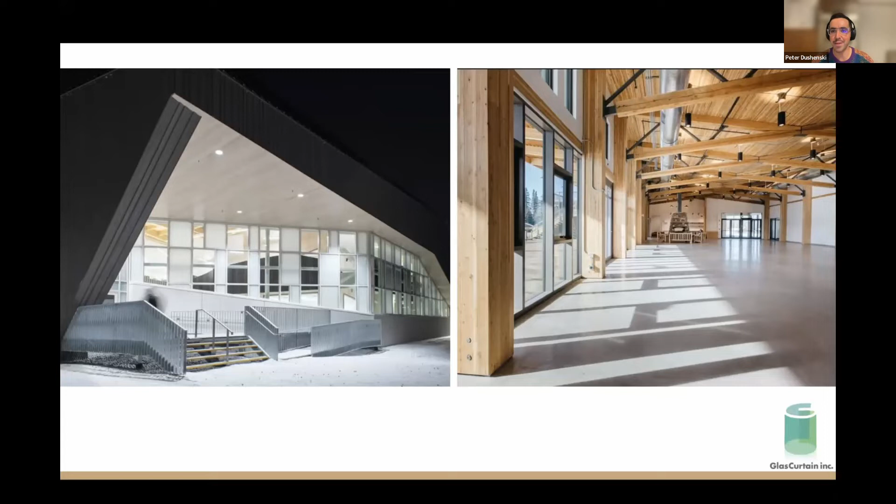So we thought, hey, we've got all the tricks in the book. We can make the highest thermally performing curtain wall on the planet. How hard could it be to certify to Passive House? Passive House has its roots even on the Canadian prairies, right? It has its roots at the Saskatchewan Conservation House in many ways. So it's like, this is our backyard. How hard could it be? What could have changed in the last few decades?

So when we took our first crack with our standard ThermaFrame 7 system, which is called ThermaFrame 7 because it's R7, we sent it to the Passive House Institute, to Adrian, who I think I saw here on the call. He may remember way back in 2017. Hopefully we didn't convey too much bravado at the time. We thought at the very least we could certify to the cool temperate standard, which is 0.8 watts per meter squared Kelvin. Not quite. We weren't quite there. We were actually at 0.93 watts per meter squared Kelvin at the time, with fixed glazing of 0.7 watts per meter squared Kelvin.

And sorry, I know there's a lot of talk about U values and BTU imperial units, but the rest of this presentation will be in metric. It's worthwhile noting that while in Canada we use a mix of imperial and metric, we still use NFRC in Canada, and that was a learning curve for us to figure out the EN 673 standard that the European systems, the German certification that Passive House is using, are certified to. So that was a bit of a learning curve, but it's interesting to note that the projects that we've dealt with so far actually have this same challenge as well.

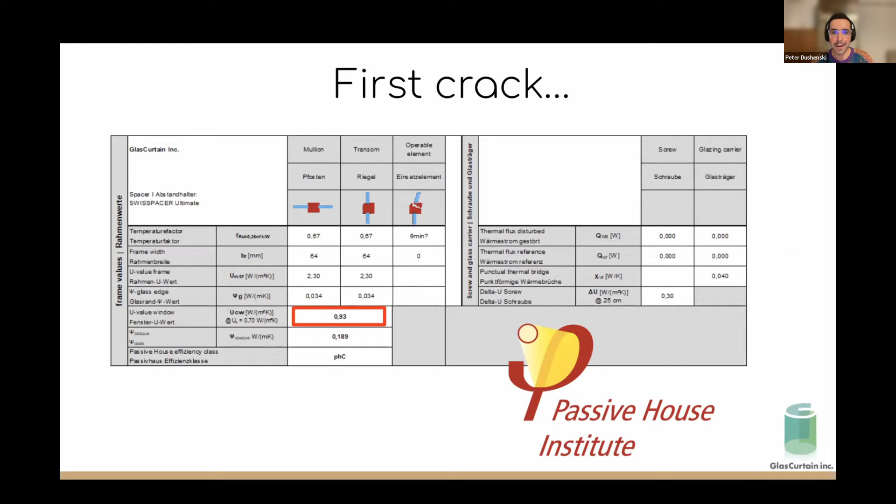But yeah, this is what our standard system looked like when we did our initial preliminary models, attempting to go to the cool temperate climate standard. And it just was not quite good enough. We were off by a good 15% or close to it. That was a bit of a wake-up call to us, but it was also a nice challenge. It seemed like we actually needed to go back to the drawing board and figure out how we can improve our system.

What is it that these aluminum-based manufacturers are doing? Fiberglass conducts 200 times less than aluminum. How is it that we're leveraging this advanced material technology of fiberglass framing, and yet we still can't compete, at least in our preliminary standings, with the Reynaers and the Schücos and these other aluminum curtain wall companies, mostly coming from Europe?

So it turns out we were able to, I wouldn't say totally reverse engineer what they were doing, but definitely learn a lot from the designs. The gaskets they were using were very different in size, much larger. They had these special air flaps to break the airflow in the nosing cavity. We also recessed the aluminum, because the aluminum was outboard for our screw chase for our fiberglass pressure plates and caps.

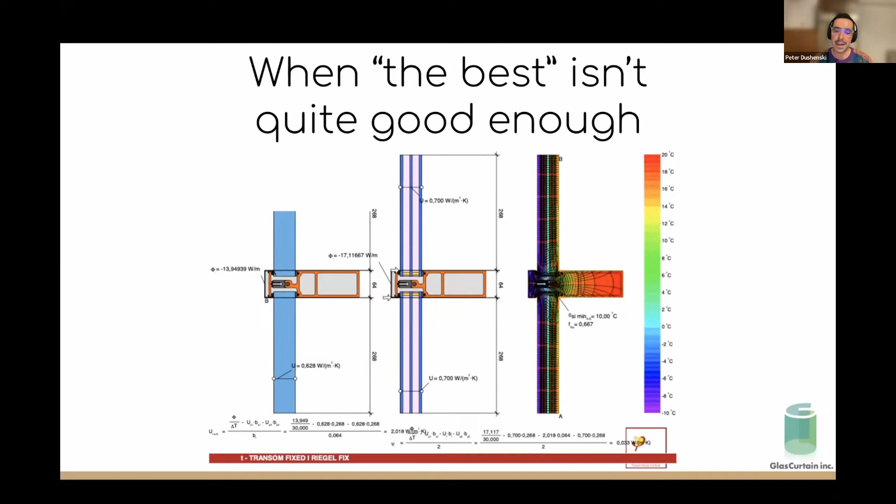And then when it came time to do our stretch goal, it was cold climate. We thought, hey, you know what? This is kind of crazy. We have this great material that's fiberglass. How is it that everyone else can do cool temperate climate? No one in the world could do cold climate at that time. We thought, how is that possible? How is it that no one can do this? Maybe there's no market demand.

Maybe Finland and the other northern Scandinavian countries, Denmark or what have you, weren't doing as much passive house. But we thought there's got to be a market there. Certainly there is in most of Canada, except for a little bit of the West Coast and Lower Mainland, and a little bit around the Great Lakes region, which are the large population centers, but not by square kilometer or square mileage the majority of the country. So we figured there's got to be a way to do cold climate, and sure enough, there was, but it was not a straightforward path, as Adrian, I'm sure, could attest.

And interestingly, it ultimately came out that we recessed the aluminum here. We had this EPS foam nosing, and the weakness actually became the glazing again. The edge seal of the glazing, and we had to find the best secondary seal in the world. That was the only way to get the glass to perform. And then also we had to increase the spacer. So to Stephen's point about how much difference that additional space makes.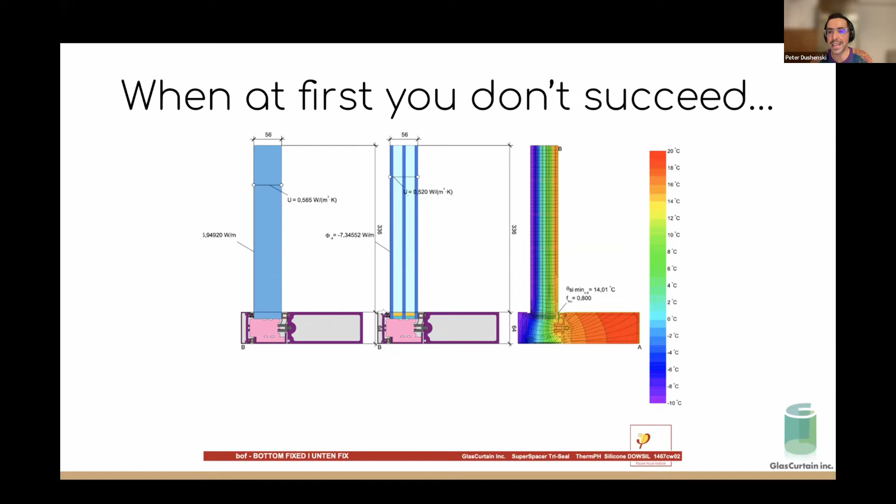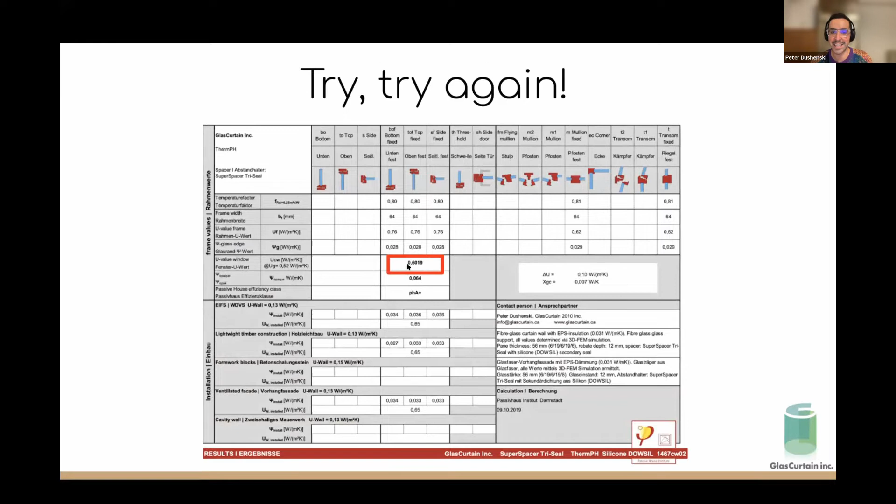And so we certified, and to talk about the different kinds of government support: in British Columbia, there's very clear government support. This whole province is going on this mission to passive house. All the manufacturers, all the home builders, the community centers, any public project will all be going towards the Passive House standard. We're all going to get there together. In Alberta, maybe Texas is the right kind of analogy. It's about gunslinging. So it's a little bit more freedom oriented, you might say.

But the government has been super supportive to support us on our vision. So they're not going to tell us what the vision is, but they've been incredibly supportive to help us realize our vision. So they helped us with the certification, as well as the new die designs, because dies for fiberglass are very expensive. So they helped us to support that initiative, which made a night and day difference, really fast tracked our adoption and our ability to make that investment. We would probably be making that investment now. We'd probably start that in 2022.

So they saved us 3 years, so that now when the market is today looking for specifying projects, we'll probably bid on 3 cold climate passive house projects this year in Canada. Imagine if we were just starting to certify now, we actually wouldn't be production ready until 2025, because in these intervening years since 2019, we've had to take this, and yes, it's one thing to model it, but it's another thing to get it to production.

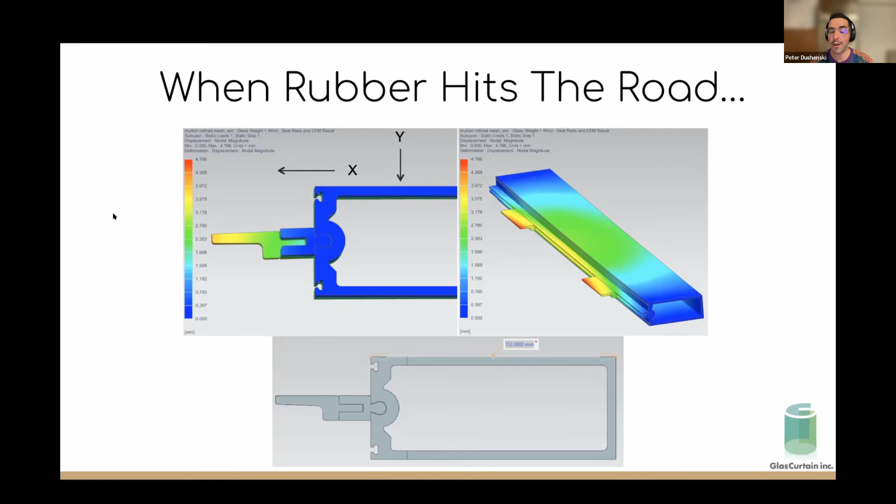There's obviously supply chain challenges with getting some of the basic materials that we needed, and even just getting the dies pultruded, just the dies cut, took a lot longer than it should have in normal times. But this is the pandemic world; trying to bring things to production in a pandemic time is never easy either. But we are production ready now. So we just finished our air water testing, fire testing is coming very soon as well. But the air water penetration, condensation testing, that kind of thing is all done for North America. That was just done a couple of months ago.

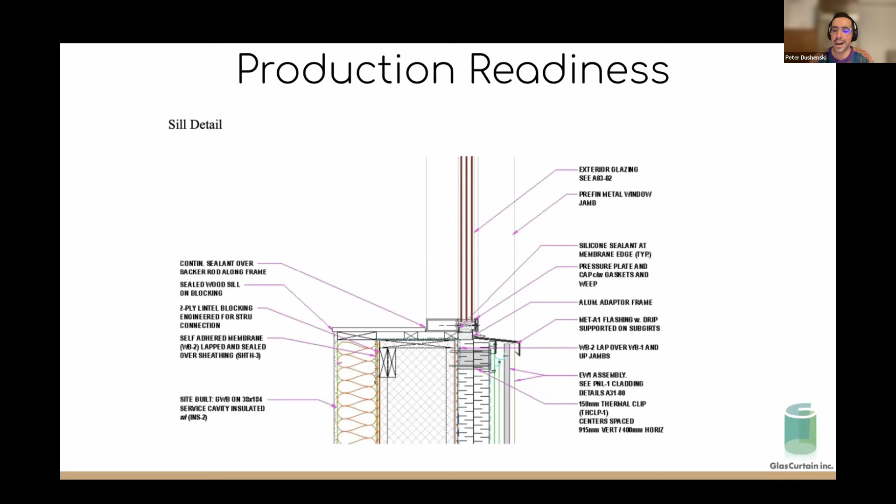And now it comes down to detailing. And this is where we are now working, because it's all very nice to have this component on the Passive House database. But now we have to make sure that these are installed properly in Passive House projects. So we're now working very closely with several design teams across the country on their various projects to make sure that these systems are designed appropriately, and to accommodate the various glass permutations and combinations that come up, because we certified to one glass, but as soon as you deviate from that a little bit, we have to remodel everything. So we've been taking on a lot of that extra work lately, which has been fun.

And of course, one of the challenges of fiberglass is its quote unquote combustibility. Of course, aluminum will combust at a certain temperature as well, but despite the thermal breaks that aluminum systems typically have these days with high performance products especially, fiberglass systems have to comply with an additional flame spread standard that aluminum systems do not. These codes will probably change in the next few years to make it so that we're all on a level playing field. But in the interim, we still want to be on the market. We still want to be competitive.

So we just have to do these additional tests, which again, we're doing in Texas actually with Alberta Innovates support and at Intertek. So we did the CAN-ULC S134 for our old system, and we're about to do, probably in May, June this year, the CAN-ULC for the Passive House system, or our new framing system, I should say, as well as the NFPA 285, which is the US exterior flame spread.

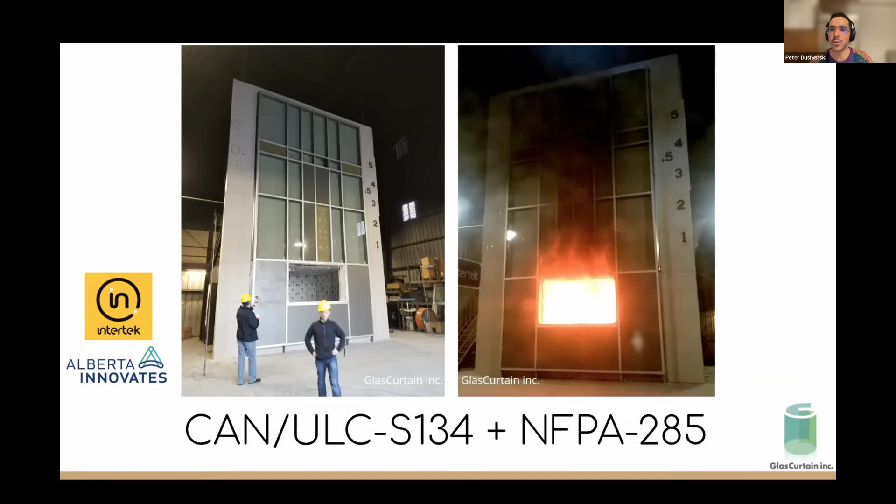So that is the other piece of the puzzle. Taking something from the drawing table all the way to site is quite the little process. But that is a little bit of our journey in manufacturing the world's first Passive House cold climate system. So thank you all very much.

That's great. Thank you, Peter. Really great insights into the development process. So now we're going to get into our discussion. So if maybe you stop your screen share, I'm going to bring Bronwyn back, Steve back, and we're going to have Adrian come back too, albeit for a short period, because I think he has to leave. So that was really interesting.

So really our topic here is about how do we shape the regulatory environment or the market environment to drive high performance fenestration, whether it happens to be for Passive House or through other certifications or performance requirements. I've said many times we have high performance fenestration available in North America, maybe not to the level that Peter just talked about, but even to that level, we're not using it, right? We're still back where the technology was 20-some years ago, and we're not even using more up-to-date technology.